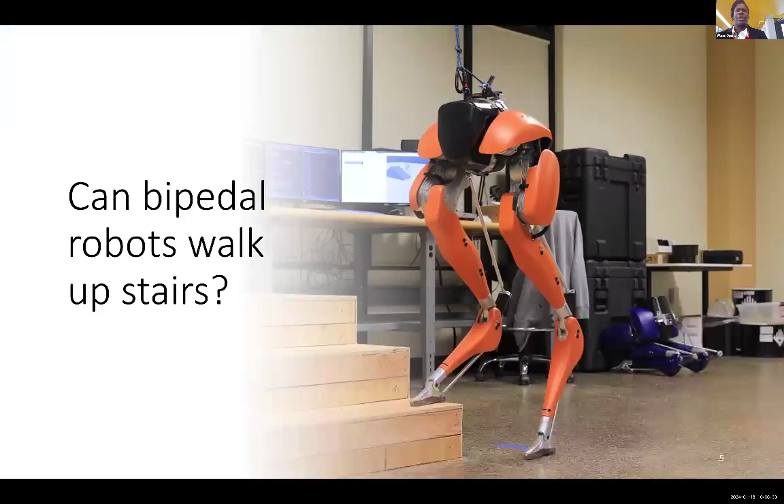That begs the question though, can't bipedal robots already walk upstairs? Well, if we look into literature, certainly we see that strides have been made. For example, you've probably seen fully actuated robots, such as Boston Dynamics' Atlas robot, where it's able to move quite agilely, especially even going upstairs.

However, I want to explore underactuated robots. Underactuated robots have the benefit of being lighter and typically can be more agile than fully actuated robots.

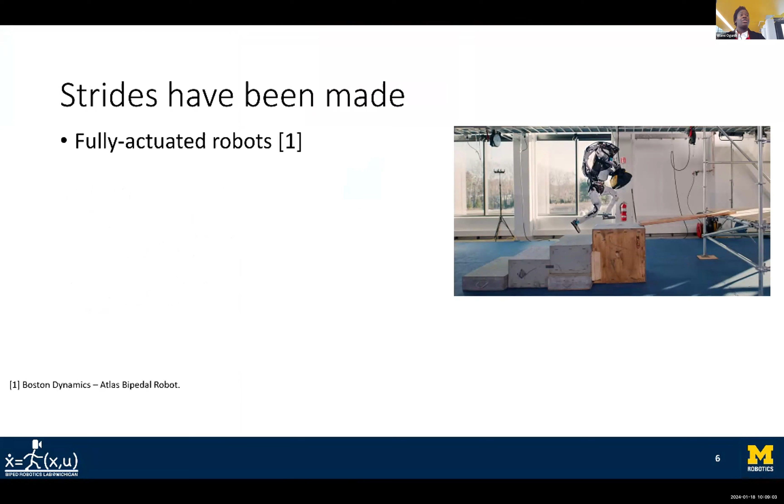We've also seen this work right here where the authors are able to get this underactuated robot to navigate through gentle slopes by approximating it as piecewise linear terrain. And in theory, one could extend this work to stair climbing applications, by approximating stair geometry as also piecewise linear terrain. However, I want to take an approach that's a little bit more friendly to sudden changes in center of mass height.

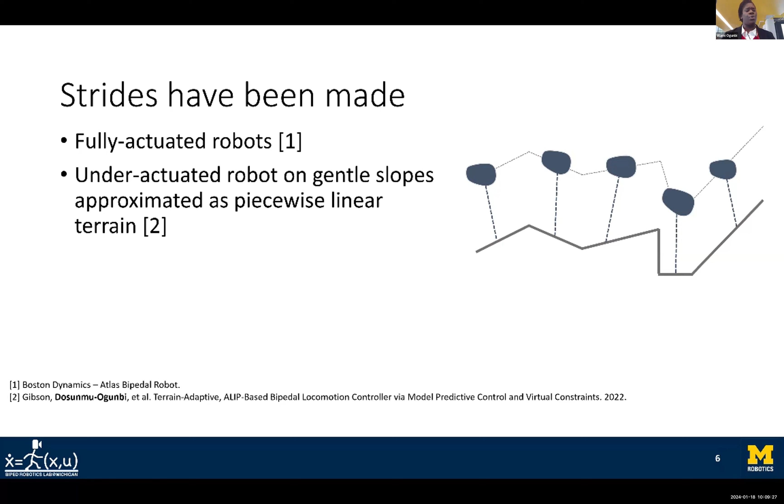And then there's also been this work right here where the authors remarkably have also been able to get an underactuated robot to navigate up and down stairs using reinforcement learning. However, the stairs are basically seen as unseen perturbations, which means in order for this robot to get up and down the stairs, it's having to exert quite a lot of torque to maintain its balance.

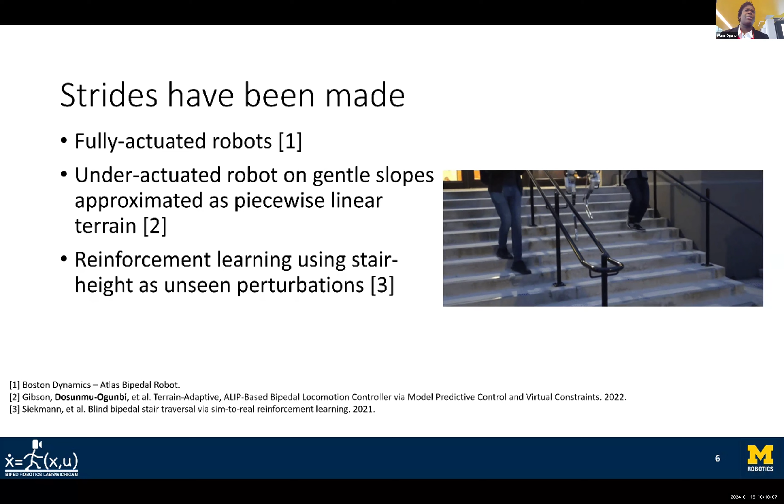And you can imagine in settings such as hospitals, for example, you don't want to see a robot that's stomping up and down the stairs. That is not a comforting sight to see. So I want to take an approach to stair climbing that's a little bit more delicate, if you will.

There's also been most recently this work right here where the authors were able to get an underactuated robot to walk on constrained footholds, including on stairs. This is just one approach to the stair climbing problem. I take a different approach, as you'll see shortly.

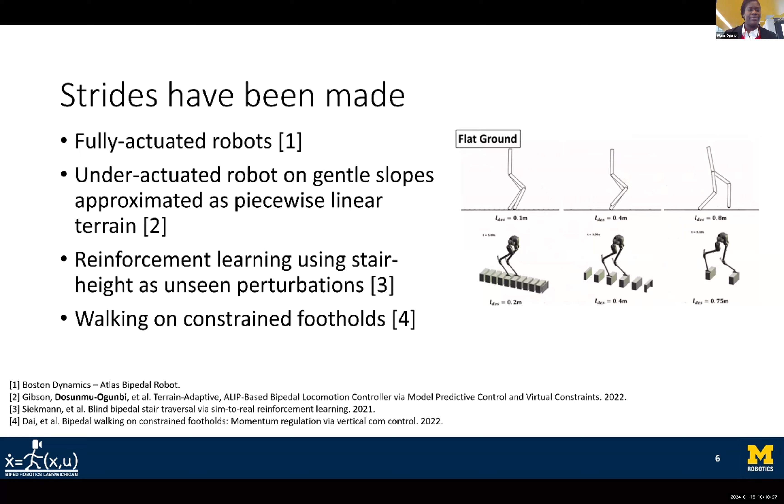So the contributions of this work, I'm going to get a little bit jargony here, but I will be explaining these terms later on. Just to lay it all out, the contributions of this work include this exploitation of a variation of what's called the ALIP model, the Angular Momentum Linear Inverted Pendulum model,

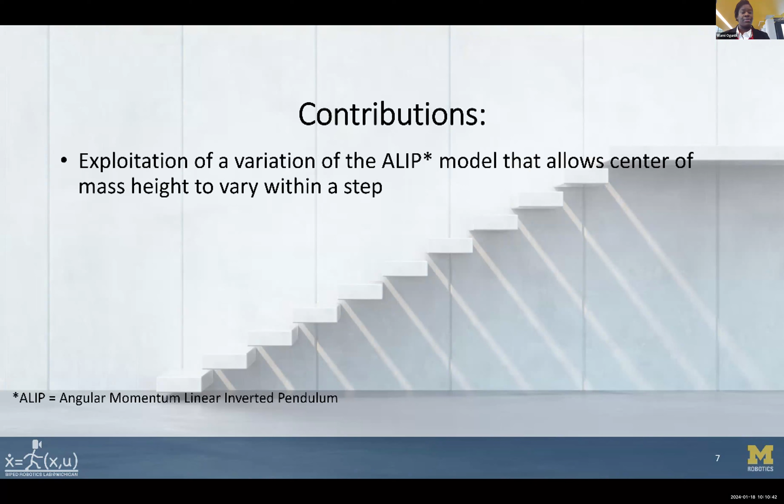that allows for the center of mass height to vary within a step. I also have this novel combination of virtual constraint-based control, using model predictive control to stabilize the stair climbing gait, and also incorporating this often neglected stance toe motor.

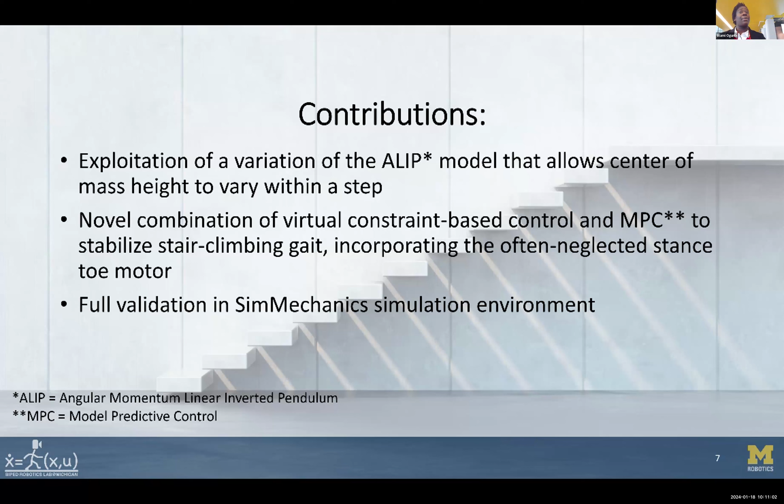I have full validation in the SimMechanics simulation environment and partial validation on hardware. So the rest of the presentation is outlined as follows.

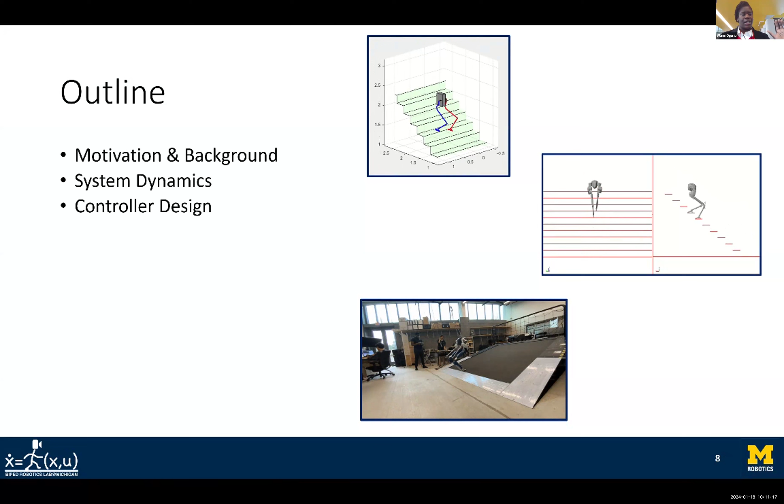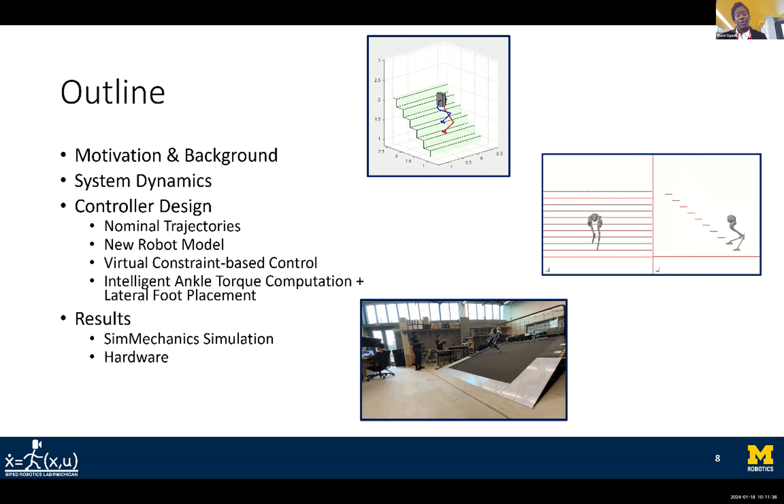We already went through the motivation and background. I'll next be talking about the system dynamics of the robot featured in this thesis, as well as the control design—specifically the nominal trajectories, the new robot model developed in this thesis, the virtual constraint-based control method, as well as this intelligent ankle torque computation plus lateral foot placement stabilization method. We'll then get into some awesome results, looking first at the SimMechanics simulation environment, as well as the hardware results, and then finally end with future work.

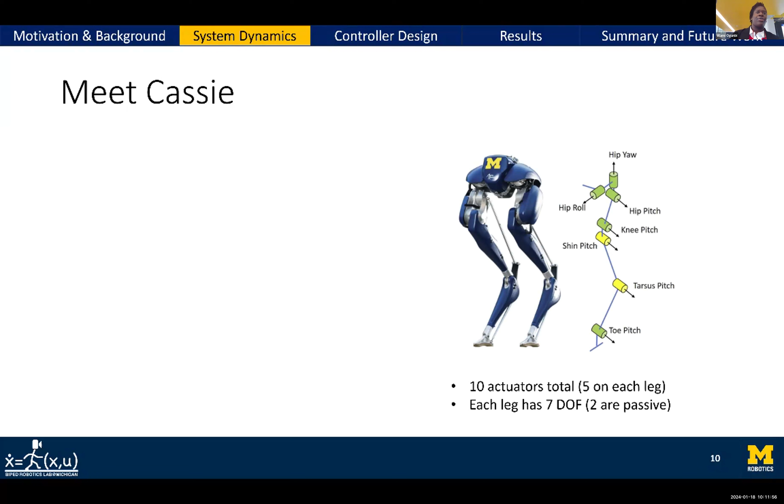So let's meet the robot of the hour, the Cassie bipedal robot. Cassie is an underactuated bipedal robot built by the company Agility Robotics. It has 10 actuators total, 5 on each leg. Each leg is also 7 degrees of freedom, where 2 of the degrees of freedom are passive.

To the left, you'll see the generalized coordinate vector of the Cassie robot, where the first 6 coordinates correspond to the floating base coordinates, and these joints correspond to its passive joints.

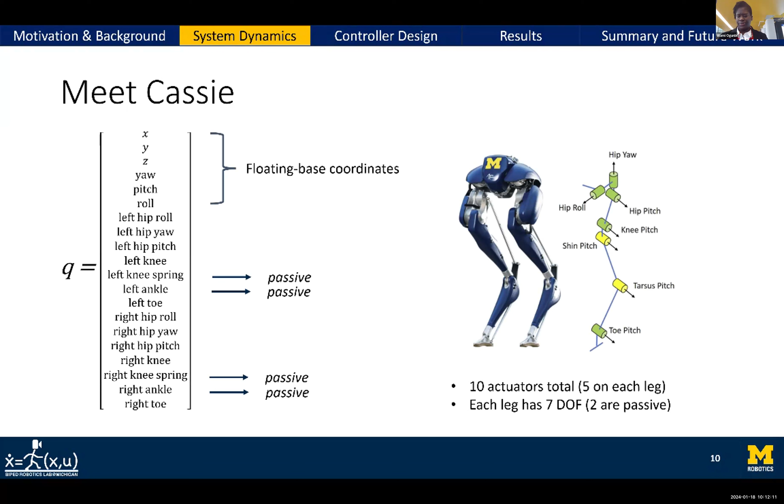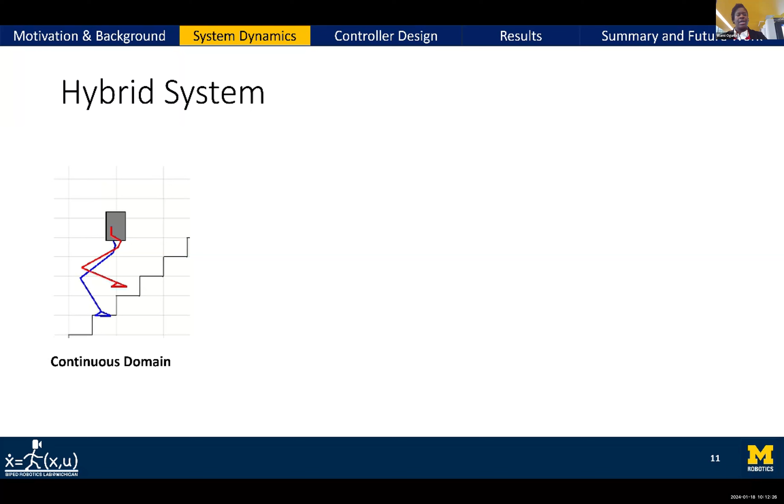We represent systems like Cassie, bipedal systems, as hybrid systems. What do I mean by that? First, there's this continuous domain where, let's say, the swing foot, the right foot, is now in the air, and right before it touches the ground, that ends the continuous domain. When it touches the ground, or impacts the ground, that's when we enter the discrete domain.

And since we have 2 feet, we do the same thing on the other side. Now the left leg's in the air, it's in that continuous domain. When it touches the ground, now we're in that discrete domain. And of course, we repeat this because bipedal robots walk multiple steps.

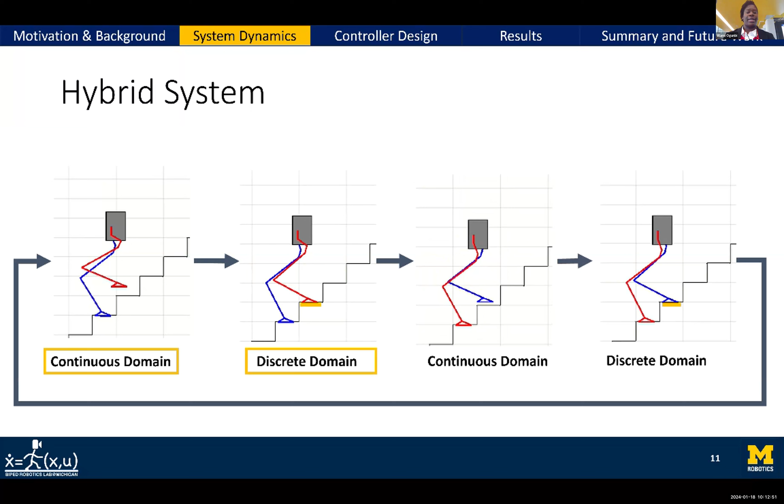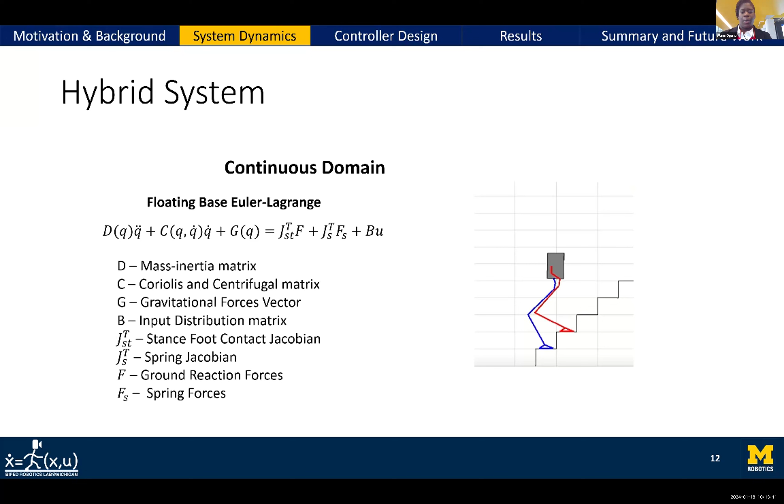However, I don't want you to be fooled by how simple this equation looks. Indeed, for a robot as complicated as Cassie, it's quite a lot to deal with. Just to illustrate, let's look at the mass inertia matrix—that's this first matrix right here.

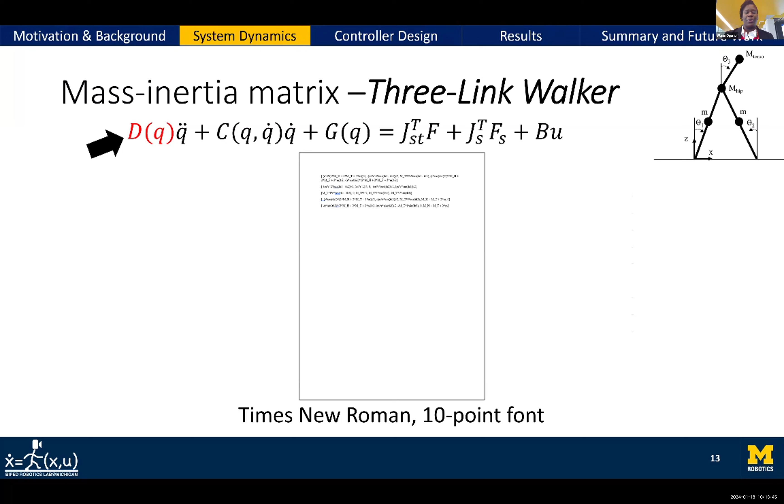Then we have the 5-link walker, getting a little bit more complicated. The 5-link walker is still a planar robot like the 3-link walker, but now has 7 degrees of freedom. If you were to write this one out in Times New Roman 10-point font, it would look like this. I wouldn't want to derive that by hand. I would not derive that by hand.

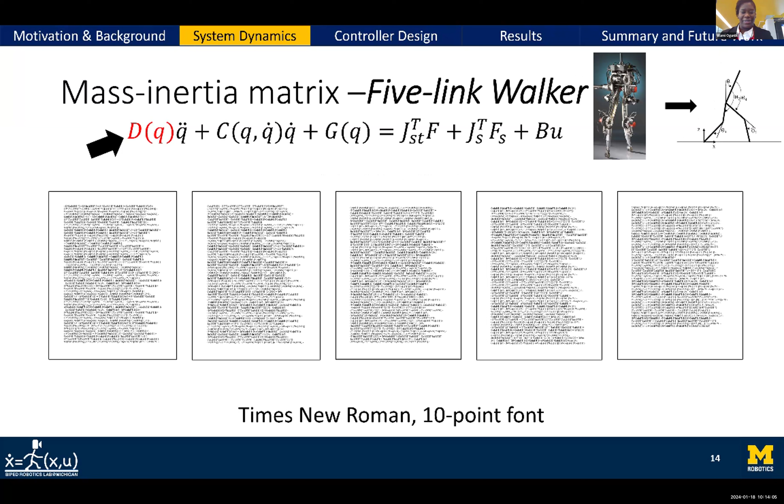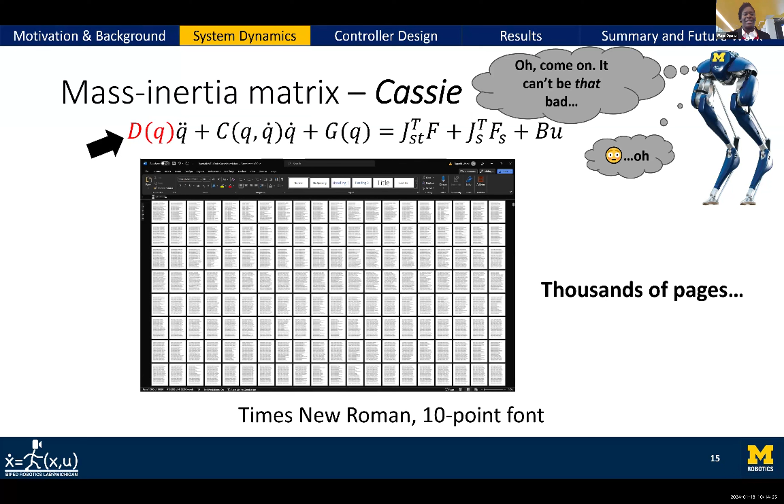So you can imagine what Cassie's mass inertia matrix looks like. Cassie doesn't think it's that bad. I say it is that bad. Yeah, it's thousands of pages. It's a lot—Cassie is a lot to deal with. And that's why we love Cassie. So all that to say, these equations are quite complicated.

So now let's move on to the discrete domain. We talked about the continuous dynamics; let's look at the discrete domain dynamics. We start with the robot equations, similar to what we saw before in the continuous domain, but now you'll notice these new terms corresponding to the swing foot. In that discrete domain, that's when the swing foot impacts the ground, so now we have to account for those impact forces, which is what we have here.

I'm going to integrate this equation from the time right before impact, t minus, to the time right after impact, t plus, and we get this, where q dot minus is the generalized velocities right before impact, and q dot plus are the generalized velocities right after impact.

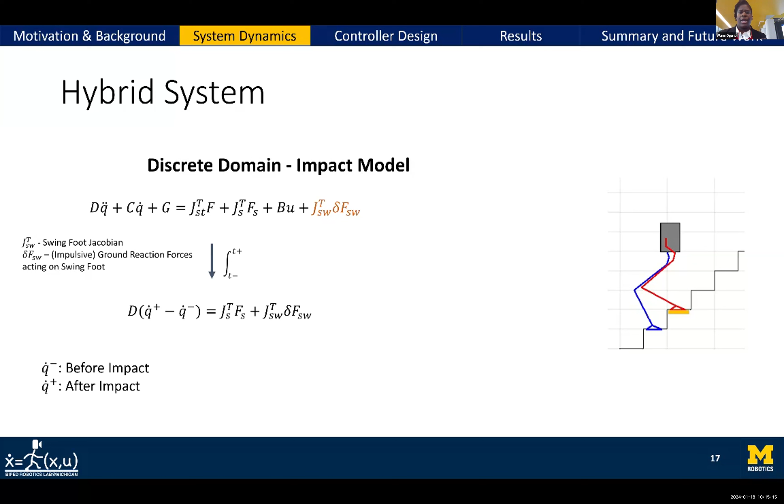I'm going to impose this non-slipping condition. What do I mean by this? This means that once the right foot, or swing foot, impacts the ground, we're not going to slip away—that's a completely different problem outside the scope of this work. So we impose this non-slip condition.

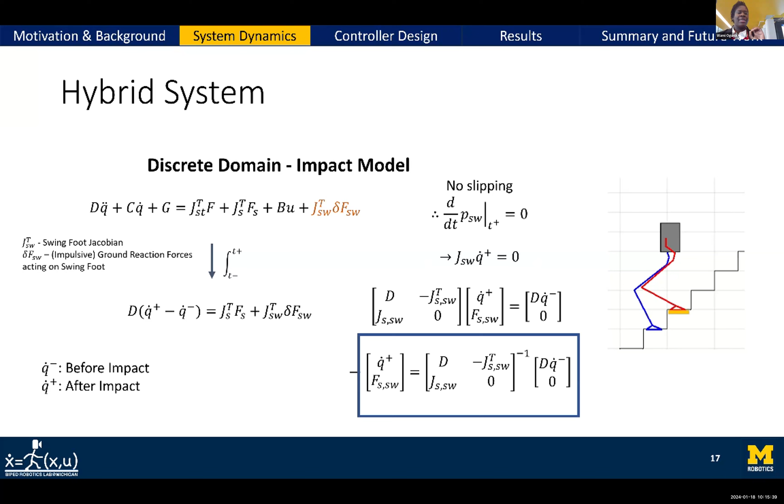Taking these two equations, I'm going to smush them all together into this matrix form, do a little rearranging, and we have what is called our impact map. This describes the discrete domain dynamics. Again, do not be fooled by how simple this equation looks—for Cassie, it is quite a nightmare to work with.

So that's our robot. How do we get this complicated robot to walk upstairs? Now I'm going to talk to you about my control design philosophy. Cassie has 20 degrees of freedom. How are we going to regulate all of them?

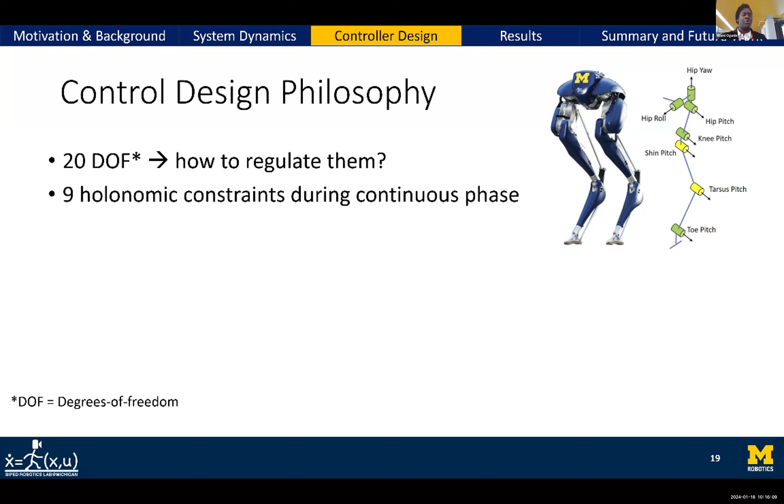Well, 9 of them are already taken care of due to the holonomic constraints in the continuous domain. Specifically, there are 4 from Cassie's springs and 5 from Cassie's stance foot. I'm then going to choose to control 9 of Cassie's actuators via passivity-based control, and this will control another 9 degrees of freedom. For that last actuator, the 10th actuator, which is the stance toe actuator, I'm going to use that to control the sagittal plane center of mass dynamics.

This represents one of the novel contributions of this work, because previous methods would use foot placement to control this plane, and I don't do this. The reason is, just think about stair geometry. You have very limited geometry to work with in that sagittal plane.

So using a foot placement strategy is not a very reliable strategy, hence why I instead use the stance toe actuator. And then finally, for that last degree of freedom, I will use a lateral foot placement controller to control the frontal plane center of mass dynamics.

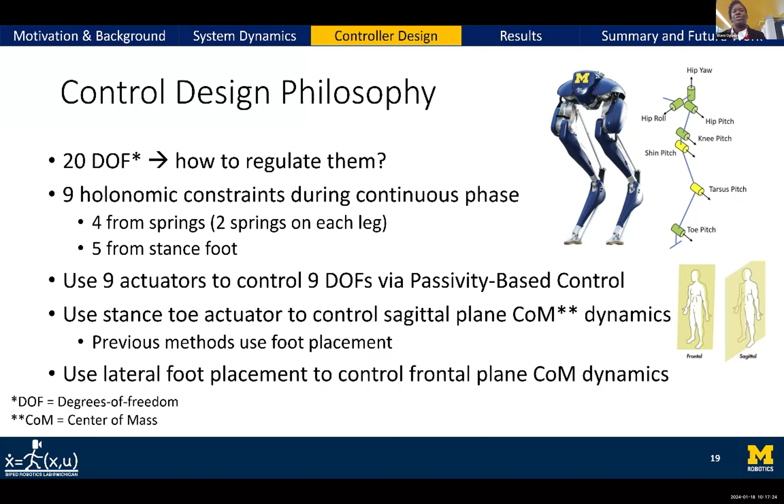And you might be like, hey, you just said you can't use foot placement in the sagittal plane, so why are you using it in the frontal plane? Well, again, just think about the geometry of stairs. Stairs are pretty wide, so using a foot placement strategy in that plane of motion is a completely valid approach, so that's what we do.

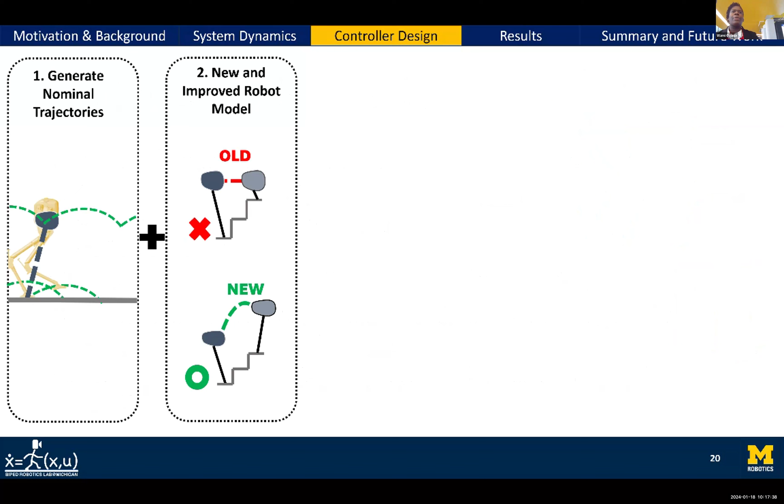So that's my control design philosophy. Let's look at my overall controller structure. First, I'm going to generate Cassie's nominal trajectories. I'm then going to develop this new and improved robot model, and then use this virtual constraint-based control using passivity-based control, which I kind of hinted at in that previous slide.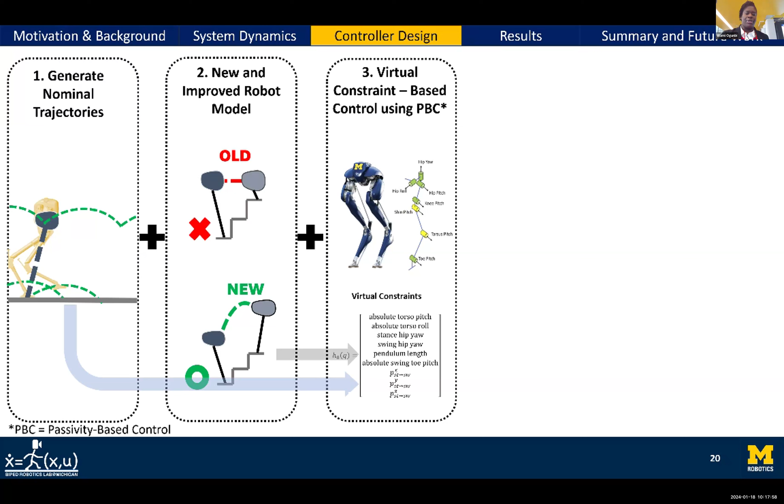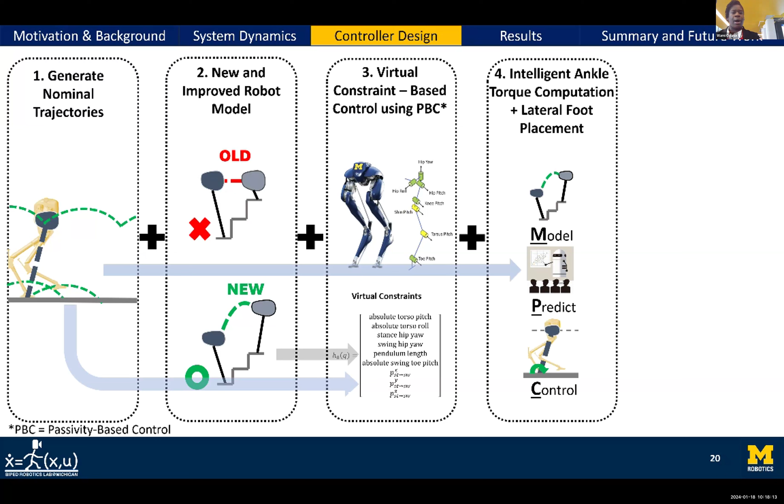I want to point out that those nominal trajectories from the first step, I use them here in the virtual constraint-based control. I also use the new and improved robot model in this particular step. And then the 4th step, we use the intelligent ankle torque computation plus lateral foot placement. Again, I use the nominal trajectories from before in this step, as well as that new and improved robot model, which we'll see.

And all this together will result in stair climbing. So let's look at each of these components one by one, starting with the nominal trajectories. I use what's called the Fast Robot Optimization and Simulation Toolkit, or FROST. To the right of your screen, you see the full order model of Cassie in the FROST environment.

I impose boundary conditions to ensure that periodicity is achieved and to include stair geometry. You'll notice that this animation is doing this arch motion with the feet. That is those boundary conditions at play. So that means that once we apply this onto the actual model of Cassie, it will avoid those stair geometries.

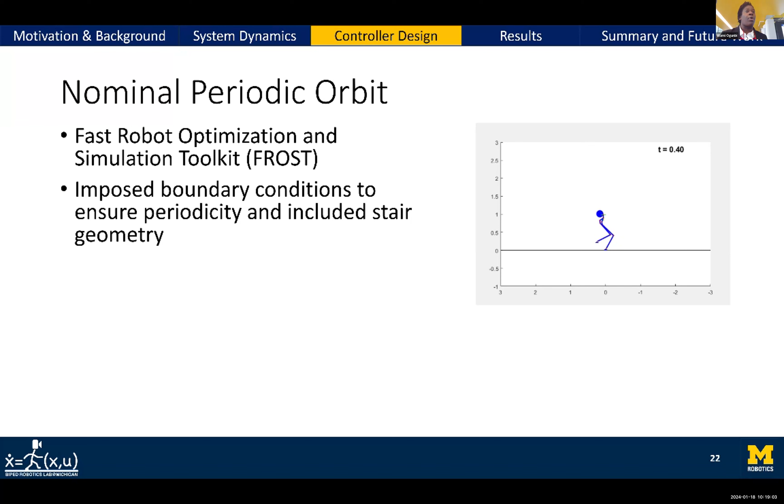These trajectories were generated to specifically be used in the virtual constraint-based control method I mentioned before, as well as that intelligent ankle torque computation, or model predictive control, in that fourth step. I generate trajectories not just for stairs, but also for flat ground and various inclines. The reason is because I don't want my controller to just be able to climb upstairs—it should also be able to navigate through various different gaits. So it's able to climb upstairs, do flat ground walking, do inclines, and do those transitions between flat ground and various inclines.

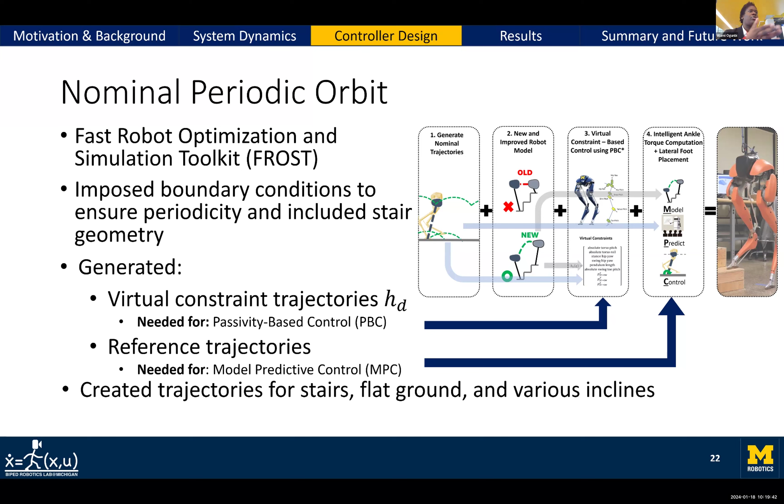Now let's look at this new and improved robot model, starting with what was the old model.

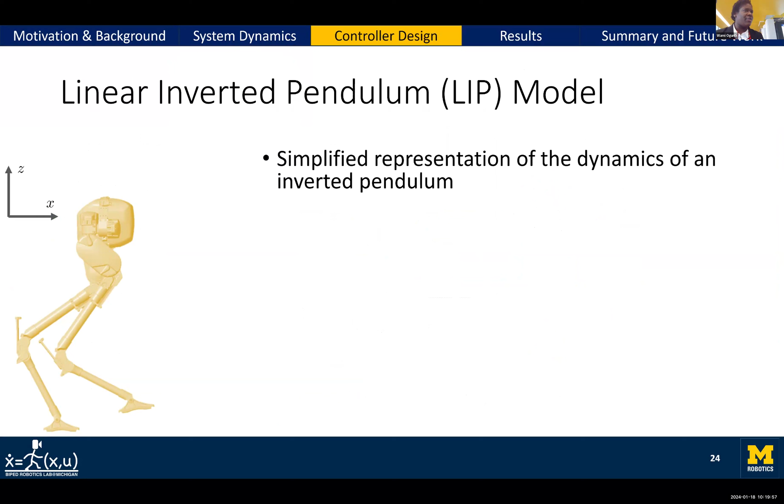We have what's called the linear inverted pendulum model, which is a simplified representation of the dynamics of an inverted pendulum. Bipedal roboticists apply the LIP model to bipedal robotic systems by approximating the robot as a point mass on massless legs.

If you look at the picture of Cassie on the bottom left of your screen, that's the full order model of Cassie. We'd represent this as a LIP model like this: its center of mass, and a vector going from the contact point to the center of mass. That's the LIP model representation of this bipedal robot.

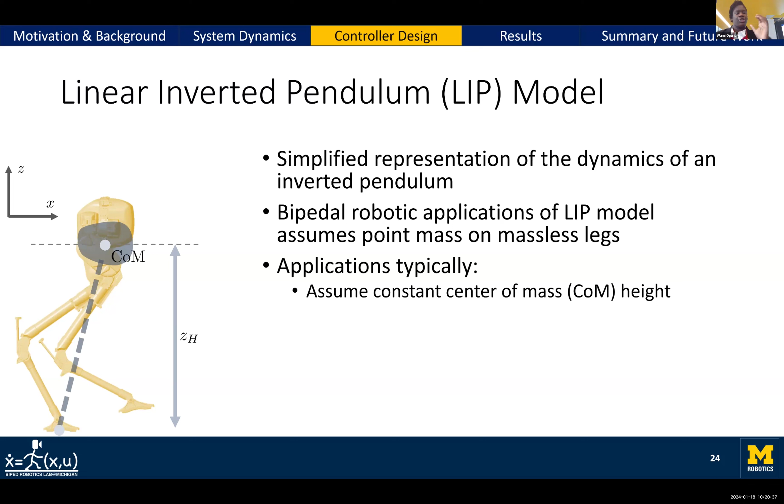Applications of this LIP model typically assume constant center of mass height, and use center of mass velocity to quantify balance. However, these assumptions are not good for a stair climbing controller.

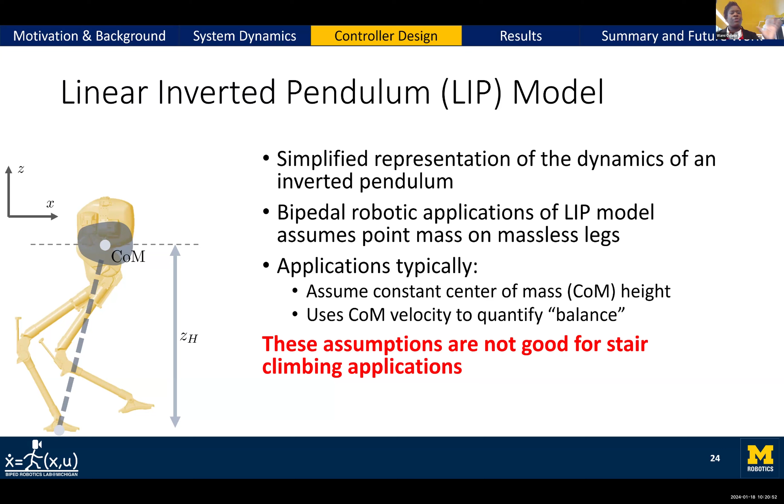So let's take it one step further, upgrading from the LIP model to what's called the Angular Momentum Linear Inverted Pendulum model, or ALIP model. As the name implies, the ALIP model is a derivation from the LIP model, but instead of using center of mass velocity, we now use angular momentum as the key variable. The question might be, why use this different variable instead of center of mass velocity?

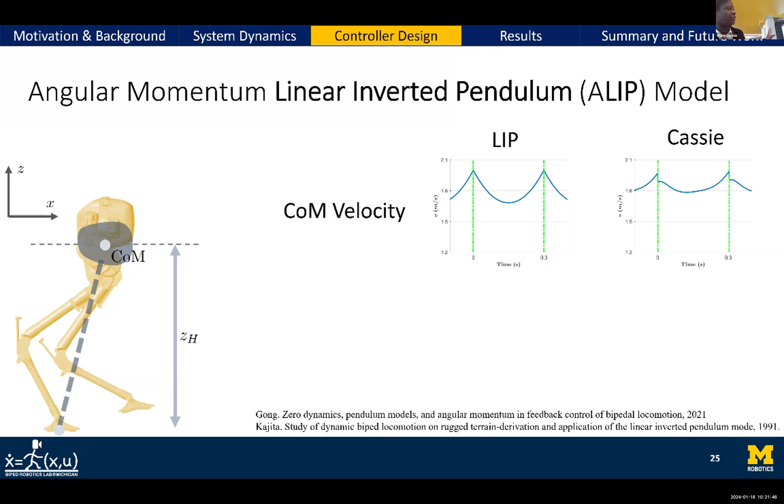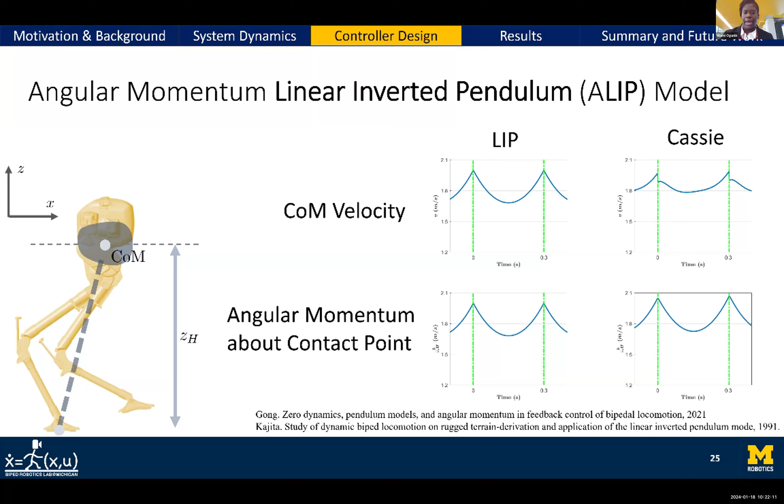I take it one step further in this thesis. Previous implementations of the ALIP model defined the center of mass states with XC, the center of mass horizontal displacement, and Ly, the angular momentum about the contact point, with full order center of mass dynamics defined accordingly. We know from previous works that the LYC term is actually negligible for Cassie-like robots, so that term goes away. This is where it gets interesting for the previous ALIP model.

People would assume constant center of mass height, meaning the Z dot term goes away. For the new variation of the ALIP model I use in this work, I reparameterize the LIP model again, adding two new variables: theta C and RC, corresponding to center of mass angle and pendulum length. So now I define the center of mass states with theta C as one of the variables instead of XC.

The full order center of mass dynamics are defined accordingly, where the LYC term is still negligible for Cassie-like robots — that's already proven. But now, instead of the constant center of mass height assumption, I make a small angle approximation: theta C is sufficiently small that sine theta C is approximately equal to theta C. To drive this home, the RC variable, pendulum length — a proxy for center of mass height — is time varying.

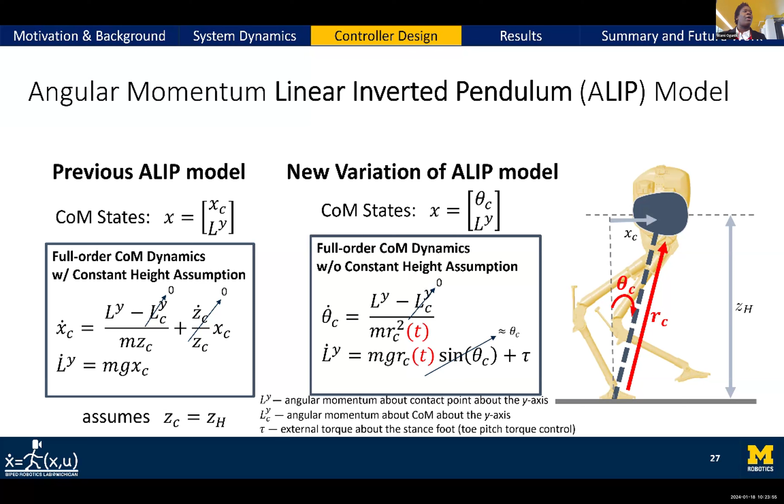But you might wonder, you're still making an assumption — saying theta C is a small angle, how can you say that? I'll show you. If you look at the nominal trajectories for theta C as it evolves over time during stair climbing, which is a pretty rigorous gait, theta C evolves from about -0.2 radians to about 0.1 radians, which is pretty small. That means the small angle approximation is completely valid.

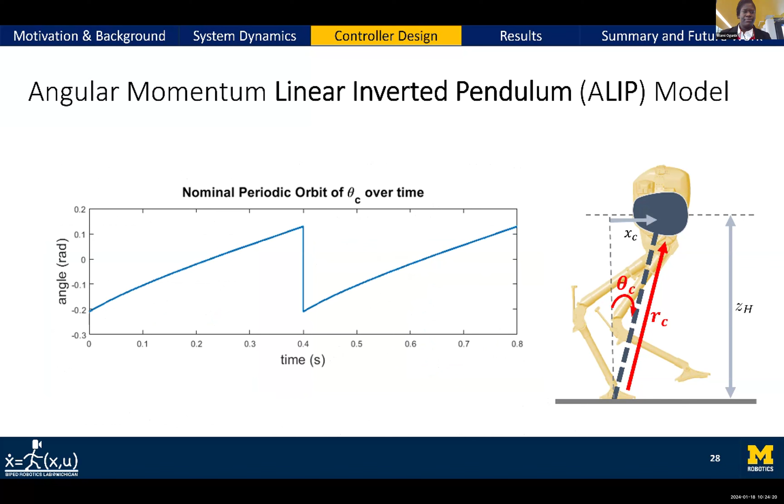So to drive home the point: the previous ALIP model typically assumes constant center of mass height, and usually uses foot placement in its controller strategy. As I've illustrated, these are not good assumptions for a stair climbing controller. Versus the new variation ALIP model, which facilitates varying pendulum length and uses a small angle approximation instead of constant center of mass height assumption. Thus, it can be used as a much friendlier basis for a stair climbing controller.

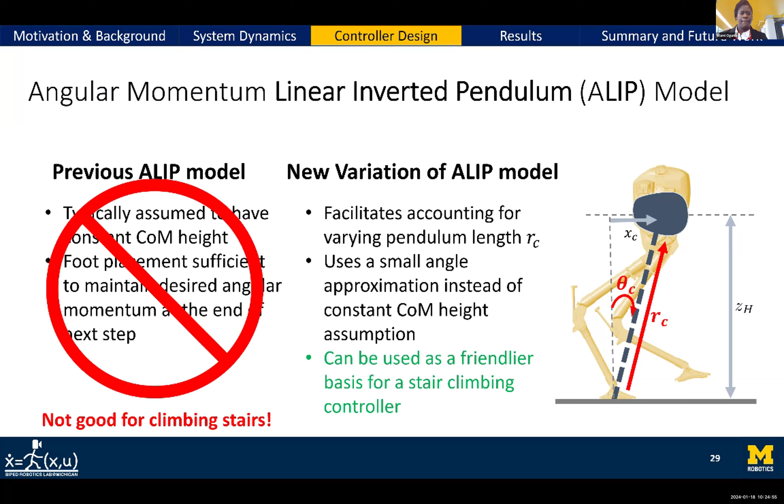So now, let's talk about virtual constraint-based control using a passivity-based controller. The passivity-based controller is used to determine the values for 9 of Cassie's 10 actuators.

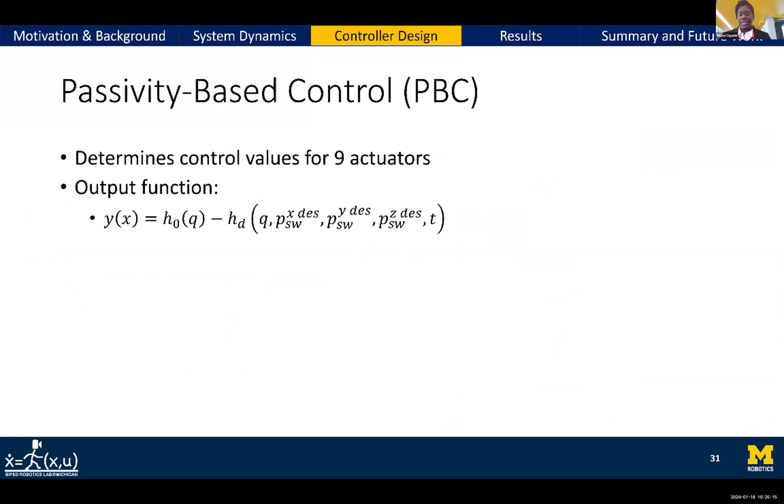I use an output function defined as follows, where H, or the virtual constraint, is defined like this. I want to draw attention to this pendulum length variable. Here you can already see that new model at play—we use it here. And those nominal trajectories from before are also being used to determine the desired trajectories for the virtual constraints.

I'm designing a controller such that this control law holds, where KP and KD are user-defined parameters, and D bar and C bar are derived from Cassie's robot equations. I have the full derivation in my written thesis—I'm not going to derive it here unless you want me to later on. So those are those variables.

I like to use the passivity-based controller as opposed to, say, input-output linearization, because passivity-based control retains the natural dynamics of the system, versus input-output, which would cross out those dynamics—that's not good. You want to make sure your controller accounts for the natural dynamics of the system.

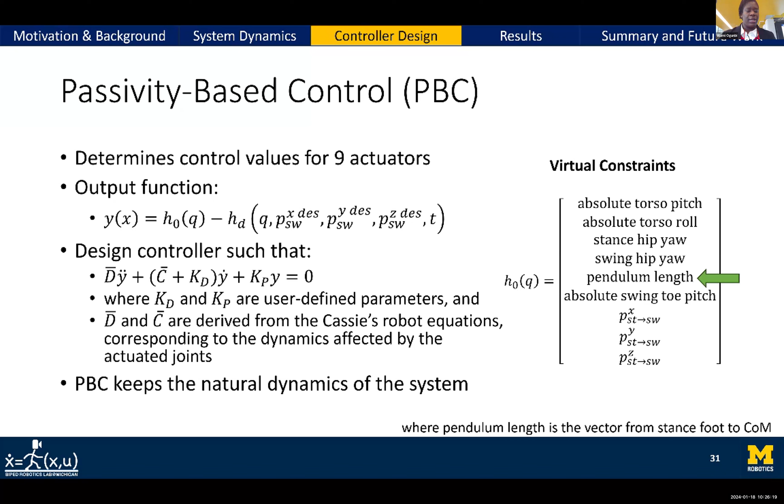So now let's get into the intelligent ankle torque computation plus lateral foot placement strategy. I use what's called model predictive control to determine Cassie's ankle torques. The premise of model predictive control is to use a model of the system to predict how that system will evolve over an interval of time, and then use that to determine an optimal set of control inputs to achieve a desired goal. So how do we implement this?

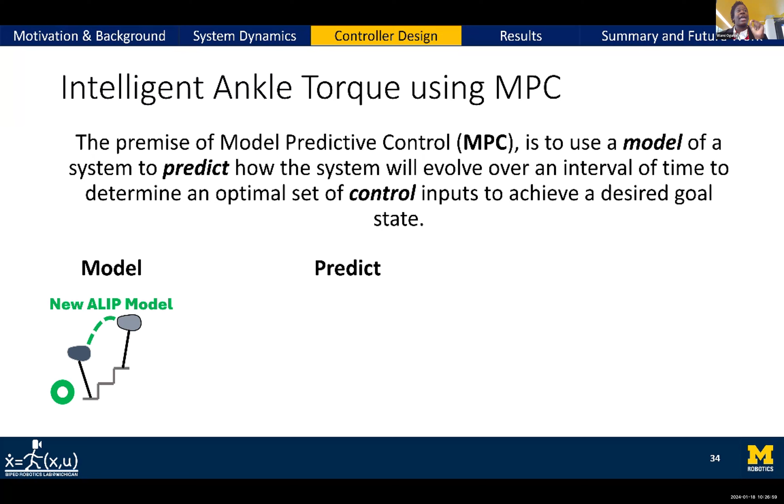The model of the system is going to be that new model I introduced earlier on. For the prediction step, I'm going to say that the trajectories I want to follow are the nominal trajectories from the first step. So now, how do I get this model to follow these trajectories? What control strategy did I use? I use a quadratic program—the roboticists and engineers in the room will recognize this as a standard QP.

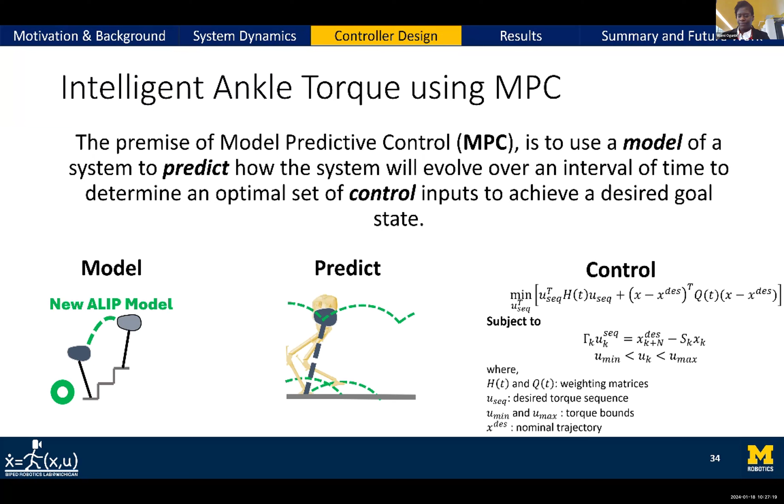So now, let's get into the lateral foot placement strategy. I determine the lateral foot placement by using this new variation of the ALIP model. I'm showing you the dynamics of the states, similar to what you saw before, except everything's now defined with respect to the frontal plane as opposed to the sagittal plane. So for example, you see an Lx variable instead of an Ly.

The way you determine foot placement with this new variation of the ALIP model is similar to the old, except the old model does allow for a closed form solution. This model, however, requires some interpolation, which I go into more detail about in the written thesis.

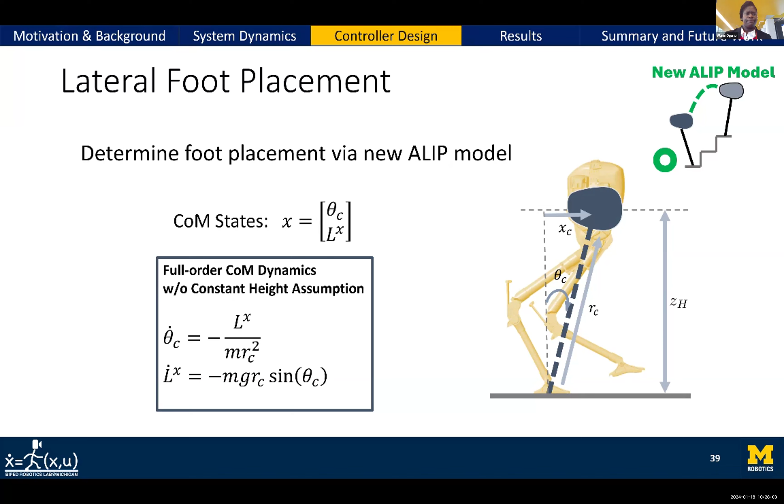So now we have our controller. All this should yield stair climbing. So let's see how this controller performs in actuality.

Insights from its Sim Mechanics simulation results. First, a little overview of the Sim Mechanics environment: we use compliant ground, it also factors in Cassie's realistic springs, and we're implementing the full controller here, so there's no abbreviation happening.

We also integrate and use state estimation just as we would do on hardware. That means Cassie has an IMU and encoders, and we use a Kalman filter to estimate its states for the controller.

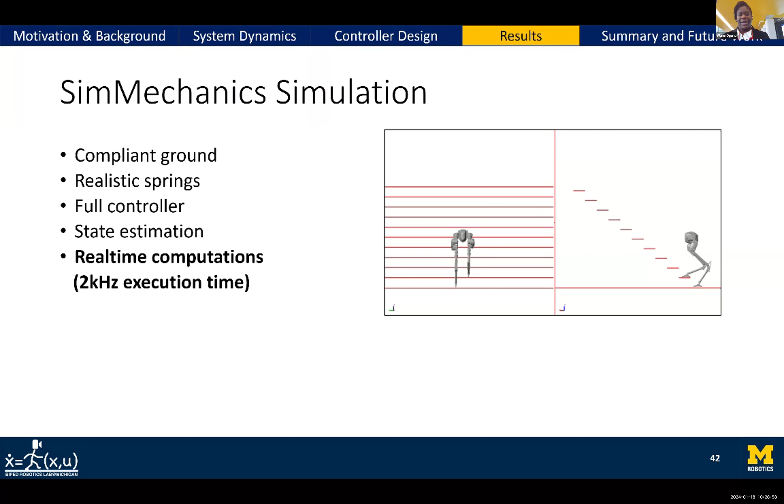We also do real-time computations in this Sim Mechanics simulation environment. For Cassie, that means the execution time has to be 2 kilohertz, which all the roboticists in the room know is a really fast execution time—it's quite a nightmare to work with. So all that to say, this is a very rigorous simulation environment, and thus controllers we find in our lab that work in Sim Mechanics typically also work on the hardware.

So first, let's just see if my controller can walk on flat ground. I mentioned that I want my controller to do more than just stair climbing—can it walk on flat ground? The experiment is defined as follows: first I tell Cassie to stand for 2 seconds, then march in place for 4 seconds, then walk forward for 8 seconds, and then do fixed step walking for 6 seconds. The last step, the fixed step walking, is the key part of this experiment.

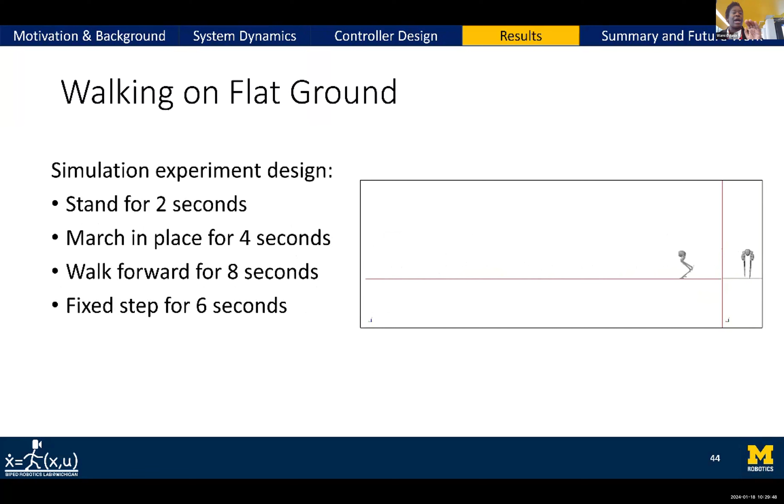So if you imagine stair climbing, you're walking with fixed steps to get up those stairs. Here, I basically translate that notion onto flat ground, so now you're walking fixed steps on flat ground. And we see how this performs.

Right now you're looking at the graphs of angular momentum and center of mass angle as it evolves over time for the experiment. When you engage the ankle torque, that intelligent ankle torque, Cassie's able to complete that experiment just fine. But when you turn off ankle torque, during that fixed step walking, Cassie falls, as is illustrated by the sudden jump in values and the subsequent loss of data that indicates Cassie falls.

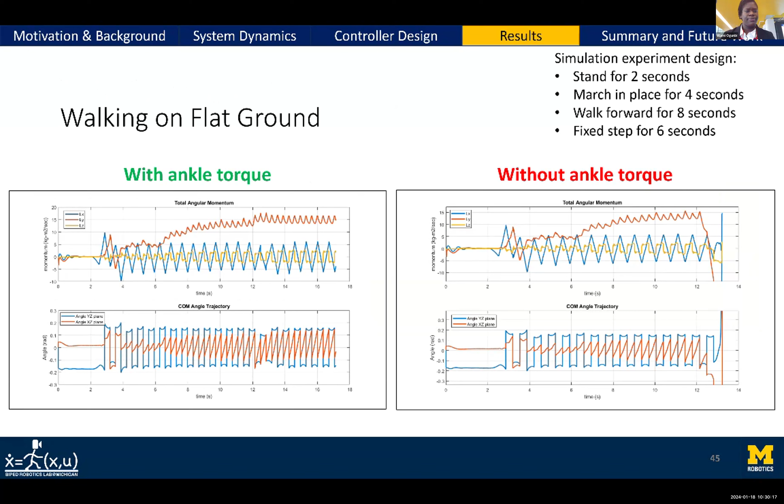How robust is my controller? Can it withstand perturbations? So I perturb the system by reducing all of Cassie's motors by one fifth of their control values for 50 milliseconds to see if Cassie's able to recover from that.

I do it first during the march in place section of the experiment. And with ankle torque, again, we can see that Cassie is able to recover, and you can see how much this perturbation affects the system. Looking at the angular momentum values, it shifts by about 5 units downward, so that's quite a large perturbation. But without ankle torque, Cassie's not able to recover from this perturbation.

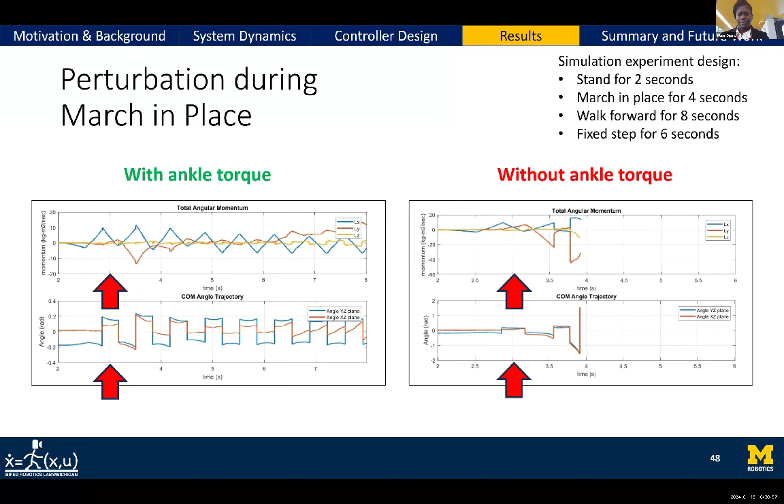I do the same thing during the fixed step walking phase, and again, Cassie's able to recover when ankle torque is engaged, but without ankle torque, no surprise here, it still falls. It wasn't able to do the fixed step walking without the perturbation, so it's no surprise that it's not able to fixed step with perturbations.

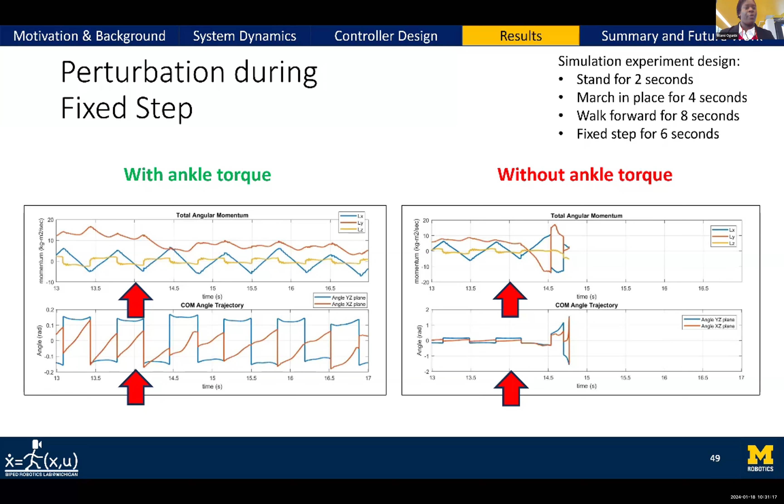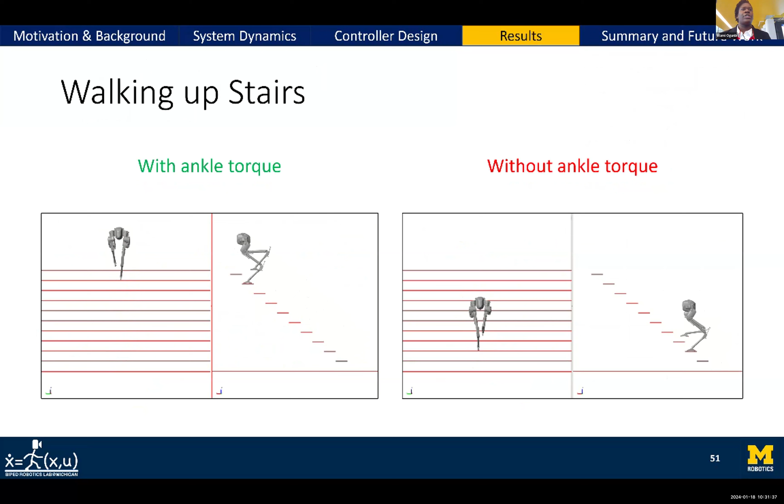Something I want to show you here is just looking at the values of the ankle torque. The magnitude is quite small, and yet these small values are the difference between whether Cassie is able to get to the top of a staircase versus Cassie falling flat on its back.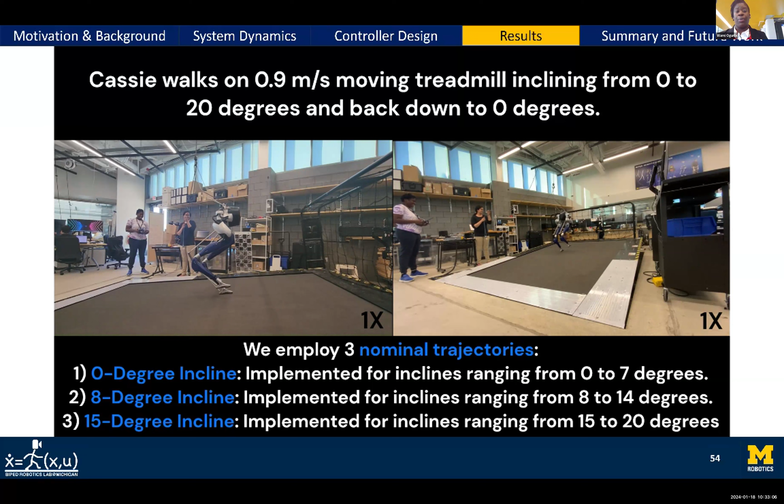Additionally, all the nominal trajectories are anticipating or expecting a speed of 0.5 meters per second, and yet I'm having, in the experiment, Cassie move at 0.9 meters per second. So again, that shows the robustness of this controller.

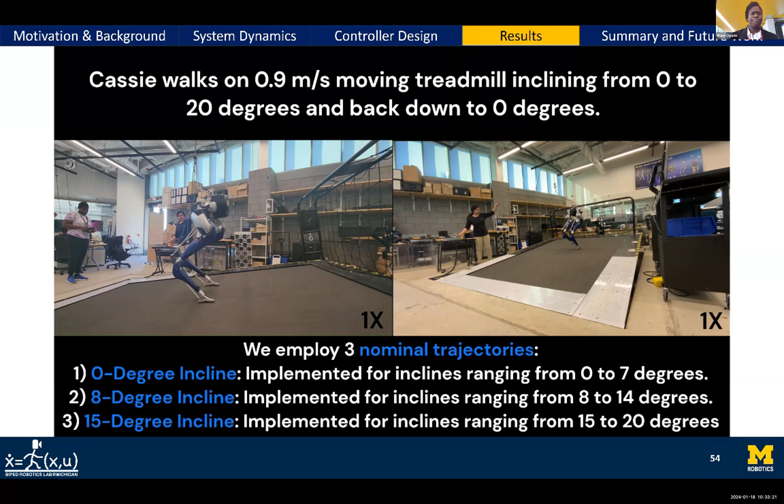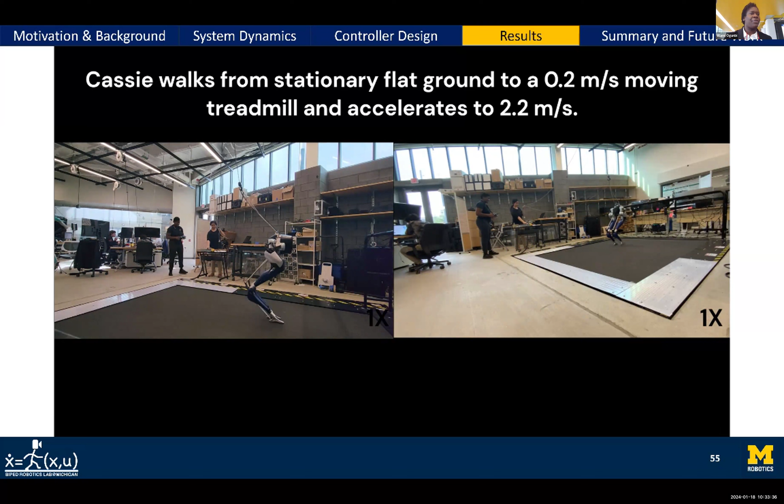So now let's look at this other experiment. Here, I'm having Cassie start on a stationary flat ground and then walk onto a moving treadmill. I want you to picture yourself trying to walk on a moving treadmill—that's difficult for us humans to do. So that's, again, showing the robustness of this controller.

When Cassie gets on this moving treadmill, I then further increase the speed up to 2.2 meters per second. Previous controllers that also work on Cassie were able to get walking speeds of about 2.1 meters per second. So this shows us that my controller works just as well, if not a little bit better, on flat ground as previous controllers.

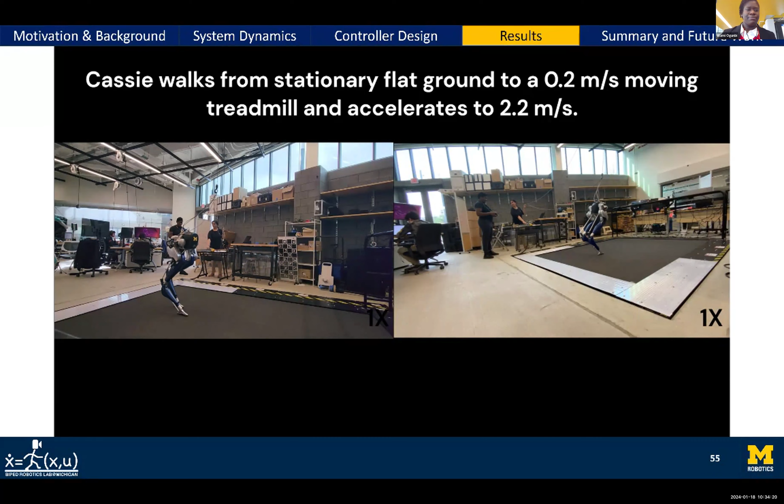In this experiment, I do something similar, but now I'm having Cassie start from stationary flat ground and then walk onto an inclined moving treadmill, where the treadmill is inclined at 20 degrees. Picture yourself trying to walk from flat ground onto an inclined moving treadmill. That's difficult for us to do.

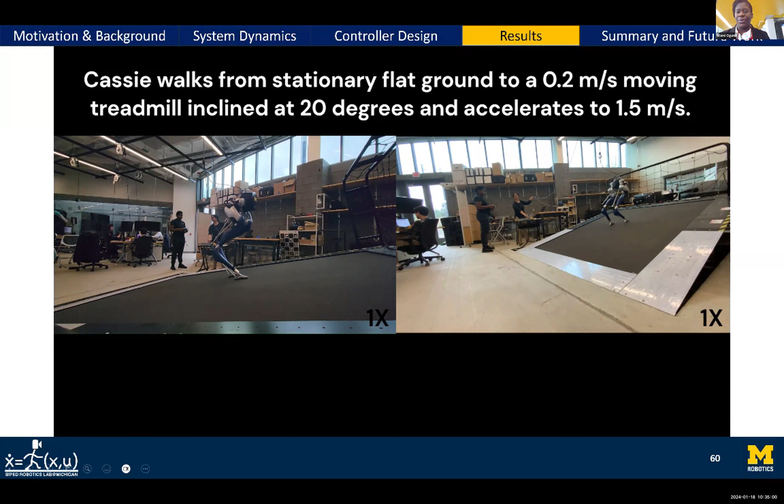Another feature you see in human life is moving walkways. You might see this in airports or fancy malls and other similar settings. So I want to see if Cassie could also navigate through moving walkways.

We have Cassie walk on from the other side of the treadmill. In real life, moving walkways move from about 0.5 meters per second to about 0.83 meters per second, so we have Cassie do that.

Something I want to illustrate is that the gantry, which is the thing that would catch Cassie if it fell, is acting as a large disturbance here, because that gantry isn't designed to move as far back as we needed Cassie to start. So while Cassie is trying to get set up on the other side, the gantry is constantly tugging at it. Yet despite this huge disturbance, the controller is still able to get Cassie from one side of the moving walkway all the way to the other.

We repeat this experiment for a faster moving walkway, about the upper end of what you'll see in real life. Again, Cassie is able to complete this experiment just fine.

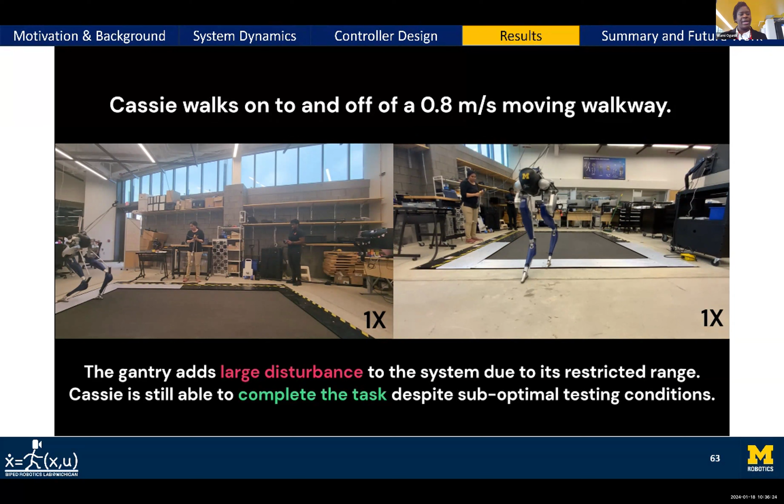Here I actually make a little mistake when I have Cassie walk across this moving walkway, the approach angle is at a little awkward diagonal. Yet despite this awkward diagonal approach and the gantry tugging at it, Cassie is able to complete the experiment.

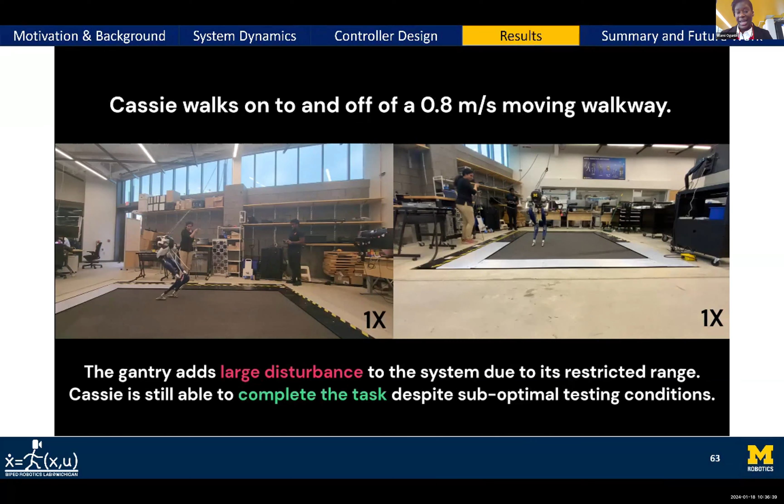I repeat the experiment again, but now with the treadmill moving at 1.2 meters per second, faster than you'd probably see in real life. Here I really want to show you, Cassie is about to stumble in a couple of seconds. Wait for it, it's finding its footing and stumbles, and yet Cassie is able to recover and complete the experiment.

This shows how much the moving walkway or the gantry is affecting the system. All that tugging was causing Cassie to stumble, and yet the controller was able to not only recover, but still have Cassie walk across the moving walkway.

Additionally, I make the same mistake here where Cassie, when it finally gets on the moving walkway, approaches at an even more awkward diagonal angle, and yet it's still able to get across just fine.

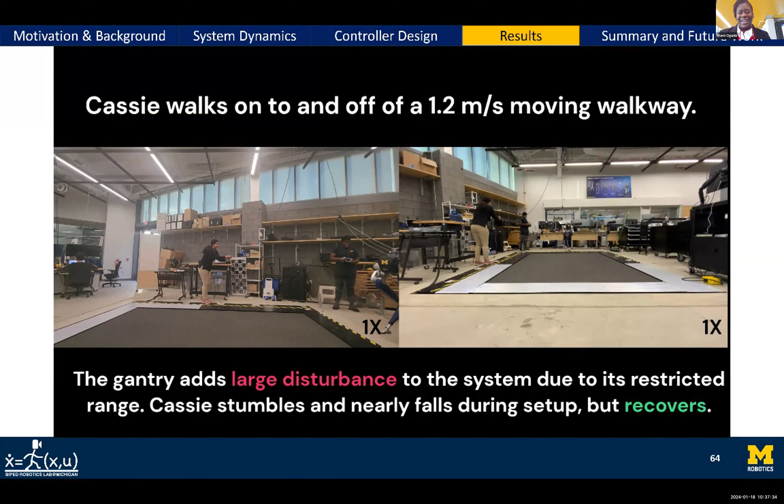So that's exciting, I'll let this go one more time because it's really fun to see. Cassie recovers and is about to cross the moving walkway with this awkward diagonal approach angle. You can see it stumbling, and yet it's still able to get across and complete the experiment.

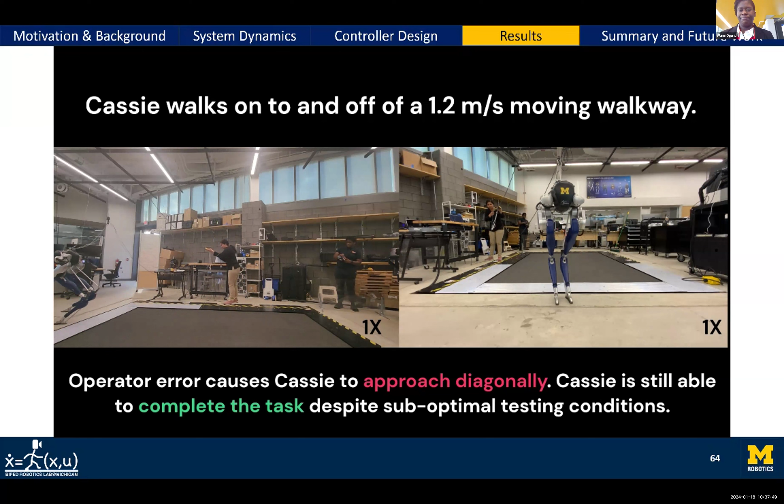A really cool thing is that this video was actually recently featured in the IEEE Spectrum Video Friday last year on November 24th, so that was very exciting to see.

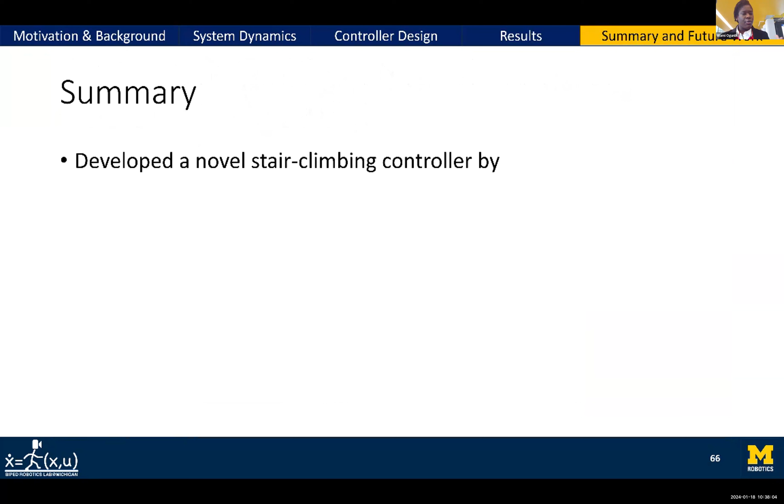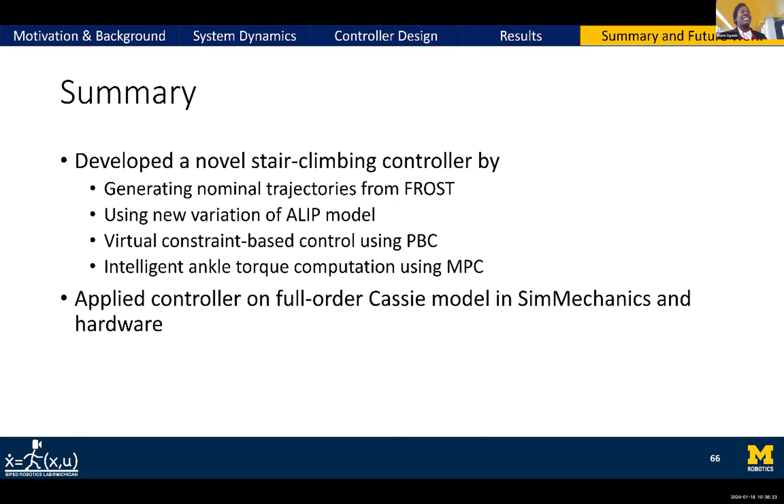So, summary of what we just saw: we developed a novel stair climbing controller by generating nominal trajectories in Frost, using this new variation of the ALIP model, as well as incorporating a virtual constraint-based control using passivity-based control. We also incorporated intelligent ankle torque computation using model predictive control, and applied this controller both on a full order model of Cassie in a SimMechanics simulation environment and on hardware.

Future work would next be stair climbing on hardware. So you might be wondering, well, why didn't you get this to work on hardware?

Why didn't you get this to work on hardware? Well, something I didn't mention is that Cassie is a very old robot, built in 2016, 2017, and it's no longer being supported by the company. Which means if and when I break Cassie, that is it. No more hardware experiments. You can't get a next Cassie.

So I've been really deliberate in making sure that I take very slow steps on these experiments. But the stair climbing on hardware is the next step.

I also want to explore downstairs walking. So it's cool to get upstairs, but once you're up there, what do you do? I want to go downstairs. So I want to extend this controller to downstairs walking.

And I want to integrate sensory feedback. So in our lab we have this awesome perception system built specifically for Cassie. I want to just smack that on Cassie and have Cassie walk autonomously upstairs.

And you might be wondering what I'm hoping to do after graduation. Well, I want to stay in academia. In fact, I am currently on the job market doing interviews and applying for positions. So if anyone's in the audience looking for an awesome faculty member, I am here.

Cool. All right, and now we are at the part where you guys stare at me while I attempt not to cry, so awesome. And I didn't trust myself to be able to speak off the cuff, so I'm going to read from a script, forgive me, so just bear with me here.